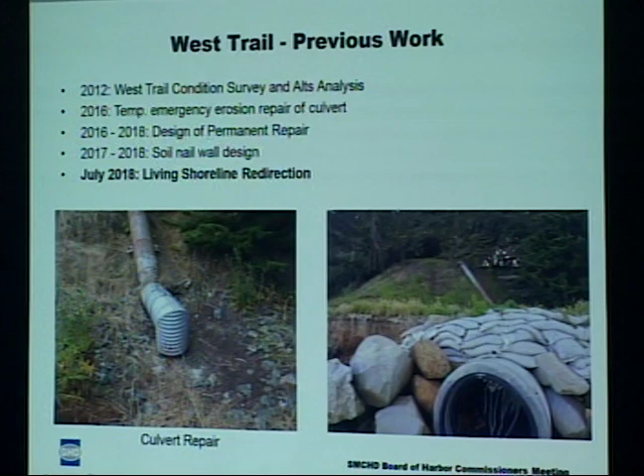Our scope of work is simplified and summarized here. Essentially we're going to look at the feasibility of the living shoreline project, minimizing hard features, notably the soil nail wall, and looking at that design to see where we might still need hard features, if any. We came up with a living shoreline alternative that we're putting forward to the commissioners tonight. Coordination with agency stakeholders, grant funders, and agencies is also in our scope of work, and we're just moving on to that task now.

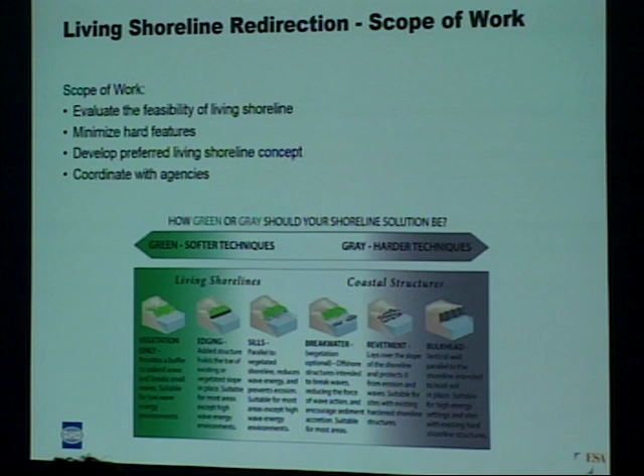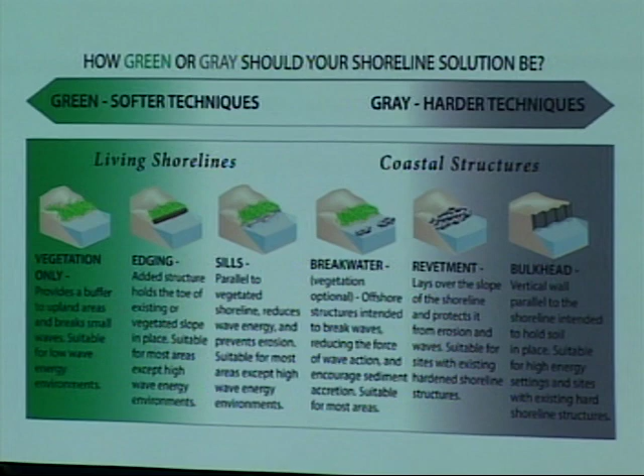This graphic at the bottom shows the spectrum of living shorelines. The living shoreline you select for a coastline depends on the wave energy approaching it, so how much hardened features you need is a function of wave energy. This is one of the first things we looked at: how much wave energy we're experiencing and what kind of living shoreline we think is most appropriate.

The first thing we wanted to understand better is our site. Why are we experiencing this condition? Why are we eroding? To go more into that, I'm going to hand it off to Bob Batalio to speak to coastal geomorphology.

My name is Bob Batalio. I'm with ESA, and I'm an engineer. I know most of you, I believe.

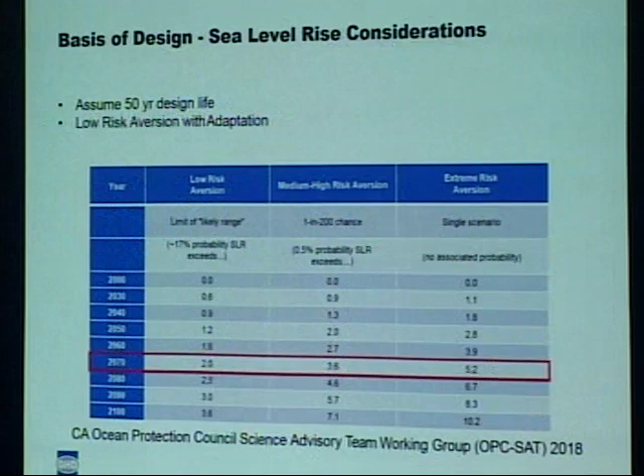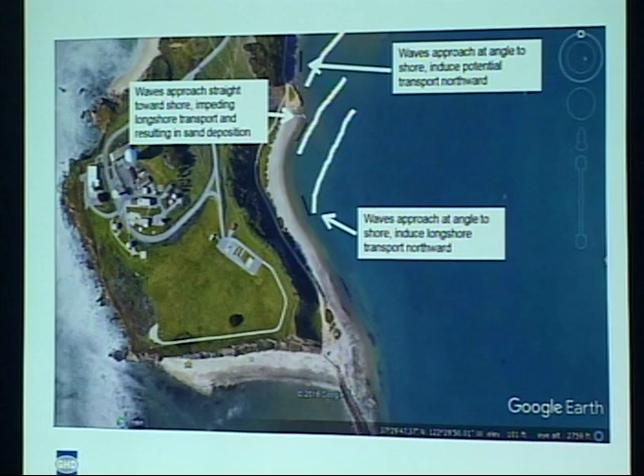When we look at our site, again we see this angle, and there's really no sand there, partly because it's probably blocked here and shunted off. There are some other things going on that we're still getting our heads around. We'll get back to this later as to what our concept is for this location and how it fits this geomorphic setting, and why we think natural infrastructure with sand, gravel, and cobble is a viable alternative here, and why we think it'll work.

So do you want me to hit the sea level rise, or? Sure. Okay, thanks, Bob.

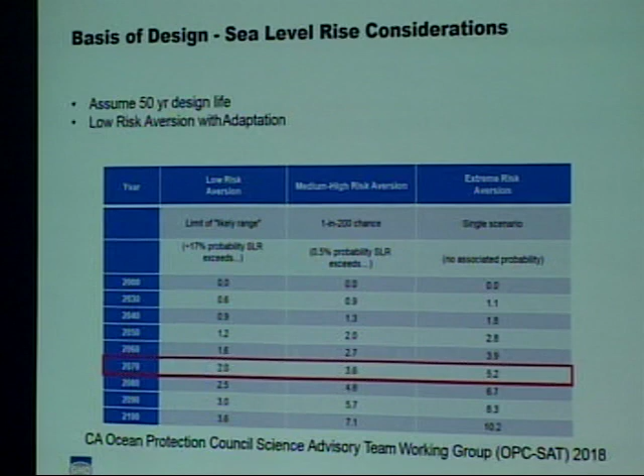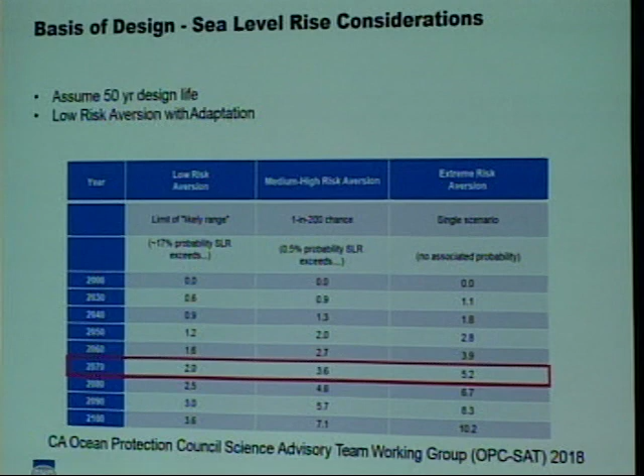So, of course, the geomorphic setting is one thing we looked at. Another thing we're considering in our design is sea level rise, and what kind of rates of projected sea level rise we want to include. There's two different ways we can go. We can either use a lower risk aversion projection, which are lower numbers in our design.

Since it's a trail, that might be appropriate. It's basically a higher probability of occurrence. So we can use a lower rate of sea level rise and adapt later, or we can use a higher rate of sea level rise into our design and then not have to adapt. So those are kind of the two decision points we have.

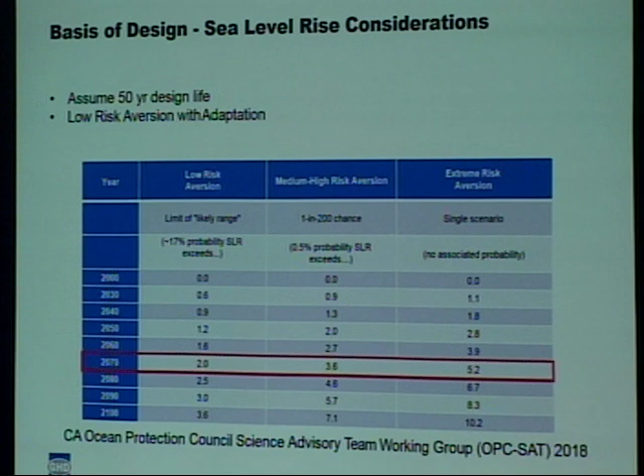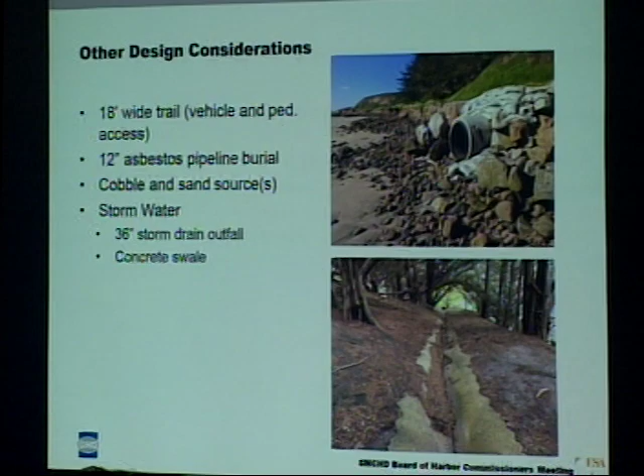As I said, we have a concept developed, but there's some tuning that we still need to do, based on conversations with everybody. Other things we're thinking through in our design is consideration of an 18-foot wide trail to maintain emergency vehicle access and, of course, pedestrians. We have an asbestos pipeline within our project area, and we know it's there, and there's ways to accommodate that in our design, bury and protect it.

Where we can source cobble, gravel naturally, or kind of within the local region that's not too out of place. So importing this material that's kind of native looking, and also where we can find sand. We understand there's some sand sources available that we're excited about.

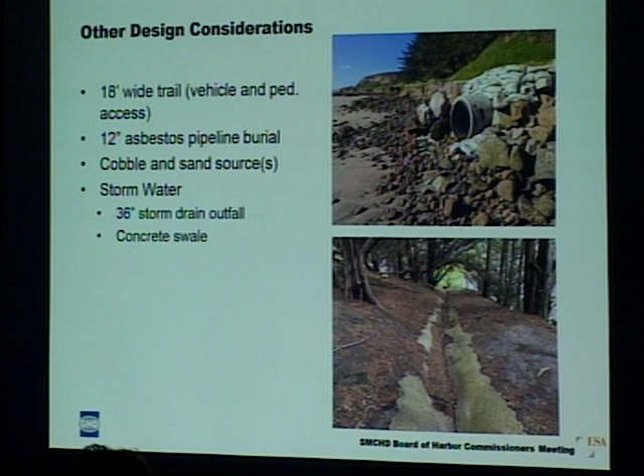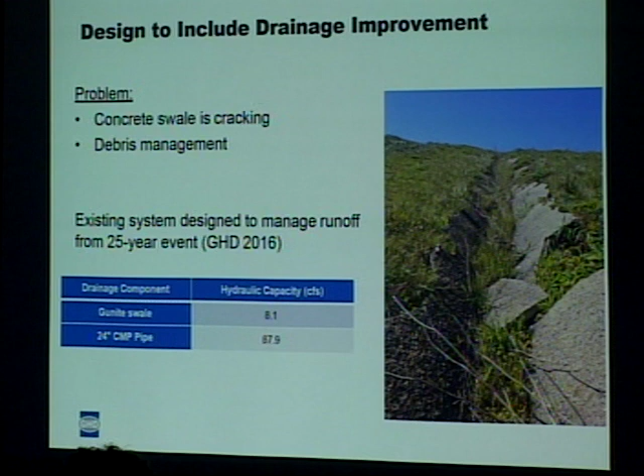And then also the stormwater infrastructure that's in place, and whether we know we need to repair pieces like the concrete swale, which was included in our old design of the soil nail wall, but we're also looking at the CMP pipe and wondering whether there's ways to kind of rethink what's there. Maybe can we remove that, and with some sort of energy dissipation, more naturalized looking feature with rock. So we're kind of thinking within our proposal, we have a feasibility of rethinking that drainage system.

So our living shoreline concept can be, I think Bob put it best, described as like a bookend, where we have a gravel cobble berm that protects our trail in an eroded state. And in a nourished state, if we have sand sources available within the harbor that we can utilize, we can potentially build out a beach and build out a dune system.

So we also have this rock finger element within the eroded case. We think that longshore transport of sand is what's eroding our beach here. So we think that creating somewhat of a groin feature, something that interrupts the longshore transport of sand, would be something we'd want to include, but we're still kind of tuning that based on future work.

And so this is kind of like the two ends that we could see at our site. And to speak to kind of the eroded bookend, the gravel and cobble beach, I'll hand it back to Bob.

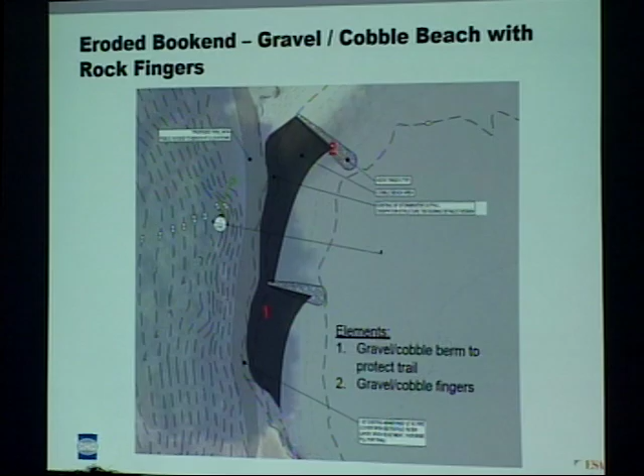Can I ask you something about the previous slide? Sure. So the number 1 and 2 fingers, can you point out where those are going to go? Is that just along the West Trail, or maybe right there?

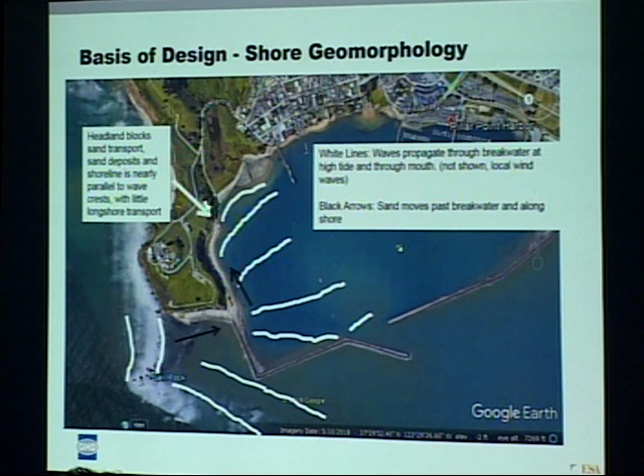It would be—this is kind of hard to see—but there would be one right here. There's actually an existing rock finger, and we want to emphasize that a little more. The other one would go close to the junction with the beach, depending on whether we have the outfall or not—maybe we don't need it there, maybe we can reroute the drainage. But if the storm drain outfall is still there, we'll probably locate the second one just south of it, so it's not in the area of deposition and is more in the area where it will be free to flow.

So they're pretty close together, that makes sense. This is a very enlarged view of a small area. Yeah, the idea is as low a profile as we can make them.

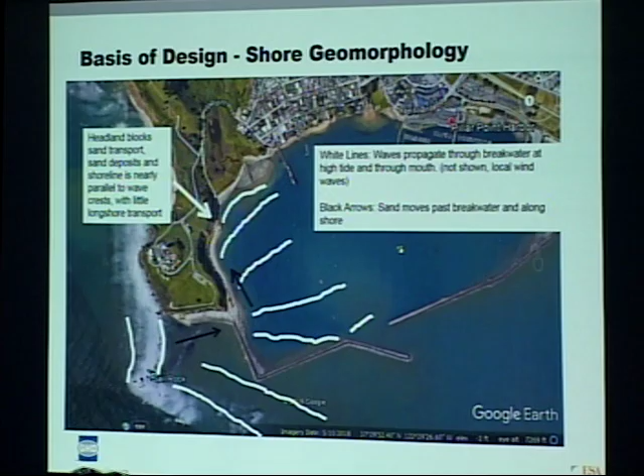With native-looking rocks if we can—that's one of the challenges. We're going to have to look for some rocks, and we don't want to cause a problem somewhere else. Ideally, they would match what's already out there, or close to it, and that's why we have this picture.

This is at a medium tide, but at a lower tide you can see there's a lot of rocks scattered about here. There's a couple—like this is a piece of concrete from something—but a lot of the rocks are native rock. They're just pieces of this that have broken off.

So there's a rock finger—let's see, actually this one, it's a little hard to see, but here and here—one of these two is where we would try to emphasize this more and extend it, and you probably wouldn't see much of that rock finger at this time. But the idea is that the gravel would have a place to deposit, like it is in this little spot. Did I answer your question?

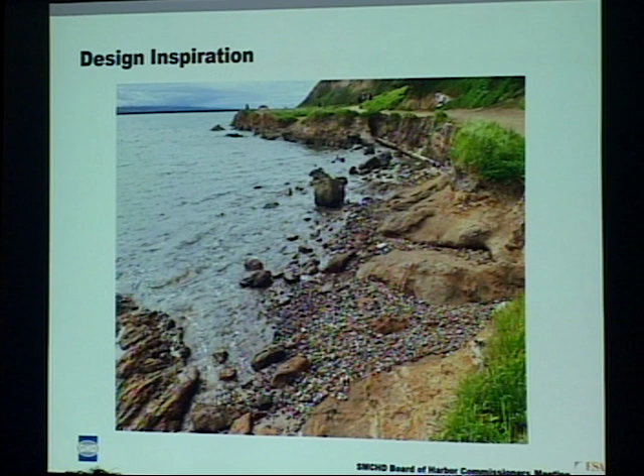And then we have a rendering—so anyway, this is what ideally this would look like: we would have the rock fingers here, put in the gravel cobble, and then cover it with sand. We may extend the rock fingers a bit to hold the sand. This is one of the parameters that we need to sort out.

Ideally, we would get something like this, which looks like the trail to the south. We recognize that this is really cool, and the Coastal Commission staff should hopefully really embrace it, but we do have to recognize that this is a bigger footprint of fill than a small one, so to some extent we'll have to see what people say. But we're pretty confident this is the way to go within a range, and we think it'll work great. I'm actually really excited about it.

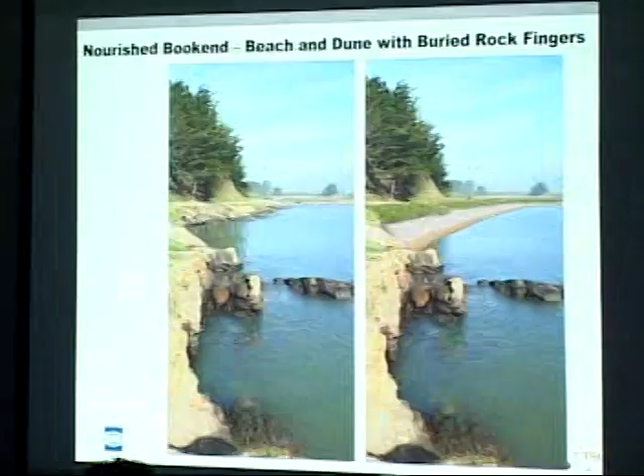Same, thanks, Bob. Thank you. And as Bob mentioned, the beach to the south was kind of our design inspiration for this site.

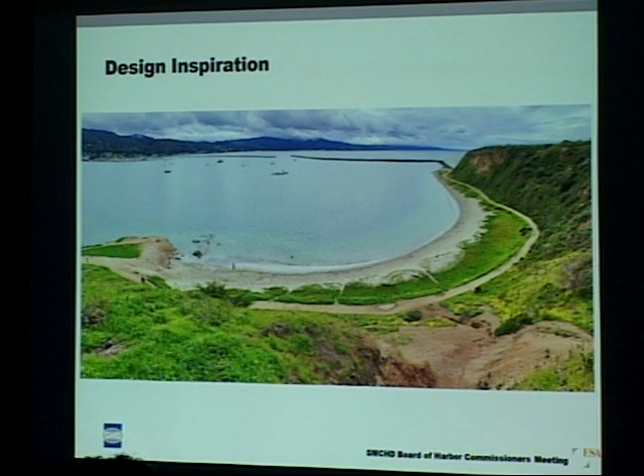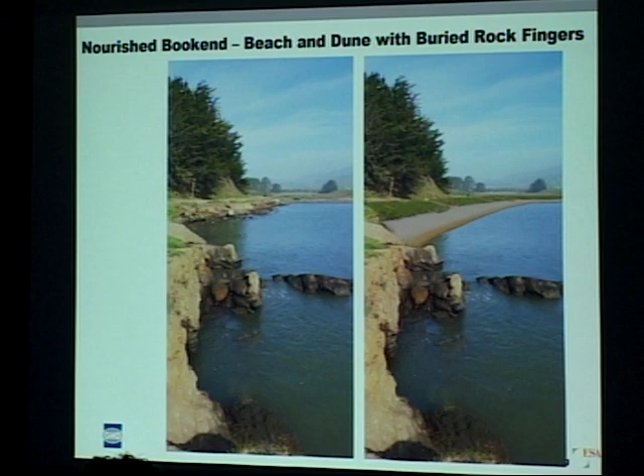Nice shot as you get on the far south side. That's kind of the scale we're looking at, as far as width, which is about a 50 to 70 foot dry beach, including the dune. We estimate needing about 5 to 10,000 cubic yards of sand to develop something like this.

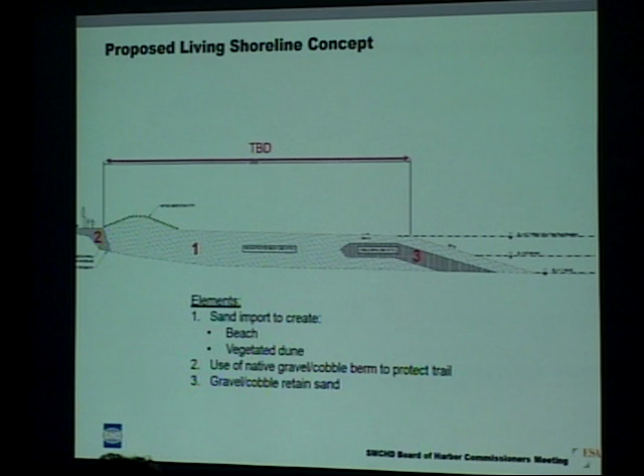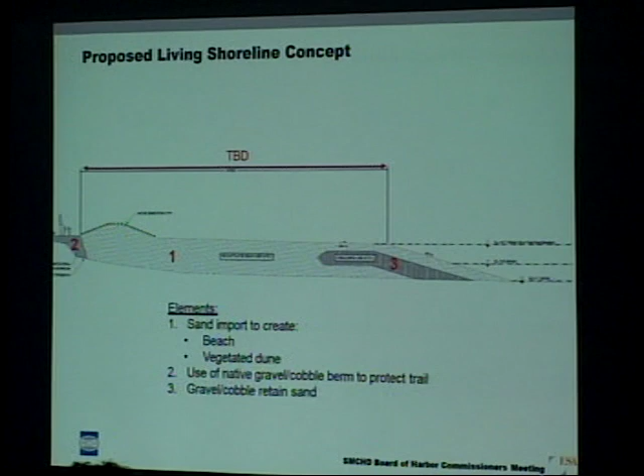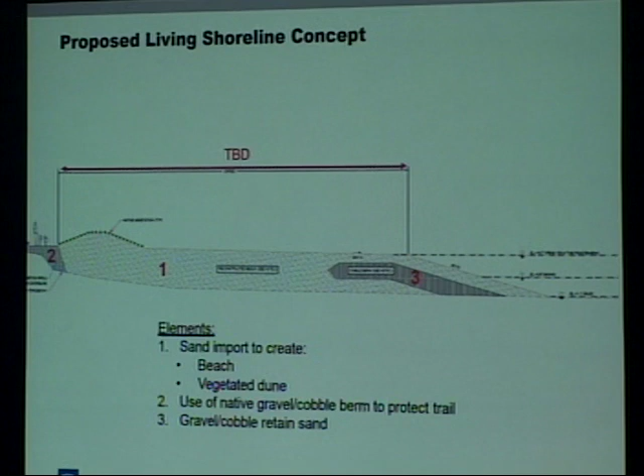This is going to be a discussion with the agencies about the width, and obviously input from the community and stakeholders about what elements are most important, habitat versus recreation. We want to balance everything, but it's going to be a moving target. The agencies involved are Coastal Commission, Army Corps, and Regional Board, since it's a fill within waters of the U.S. We hope to bring habitat in, so sometimes they consider that a net zero, or self-mitigating. That's where we hope to land.

One of the issues with these living shorelines is they're actually very popular and used all the time on the East Coast, in places like Florida, where they have an existing permitting system set up to make it streamlined and easy. Here, they don't so much—it's a new thing, so the Coastal Commission approaches it cautiously. The difference is that on the East Coast, the alternative is big seawalls and revetments, which are much more common, so they're kind of incentivizing this new method. Here, we don't have those options of building seawalls anymore, so it will be a bit of a challenge, but I think they will embrace it. They're going to ask for a lot of information, and there may be some slight modifications to the design through different iterations to address permitting concerns.

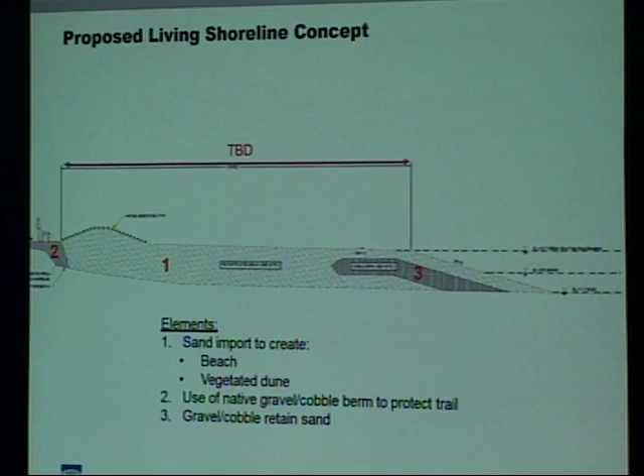Just to give people a sense of scale, the amount of sand here is 5 to 10,000 cubic yards, and the Surfers Beach replenishment project is about 75,000, so it's much bigger. Another concept with this is that there are other places in the harbor where we may want to protect the shoreline, so I look at this as somewhat of a demonstration project—something that could work, and we could learn from it to move on to the next project with a little more confidence. That would be our permitting approach, just like we're doing with Surfers Beach: demonstration, pilot type.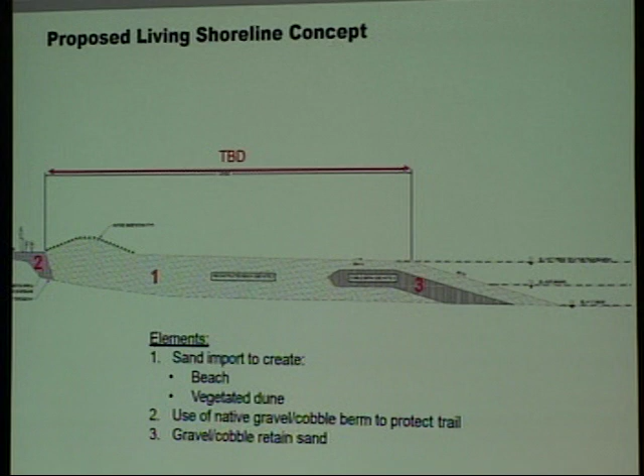So are y'all going to be talking to CAL FIRE at all, just to make sure they'll have adequate access? Or Coastside Fire, which I think is CAL FIRE. With the 18-foot width, is that— well, I don't know, have y'all talked to them? That's my point, I haven't. Is that correct? I don't recall those conversations, yeah, and based on our past experience, that would be adequate, but that's something we would definitely do.

Just because over time, that's a concern now—if there's wind, erosion, any kind of change, they'll know what they'll need, but I would highly suggest y'all talk to them just to get an understanding of what they need, because that was a concern of the public brought up a couple years ago when this project started, when I first got on. That was a pretty big concern, just emergency vehicle access. We would definitely do that, and we'd also want to control the type of vehicles used to accommodate that. They'd know what kind of vehicle they probably wouldn't use there, right? But the point is there has to be a conversation so it's available and accessible for rescue, water rescue, or whatever. That would be later. Do you have a schedule? Makes sense, thank you.

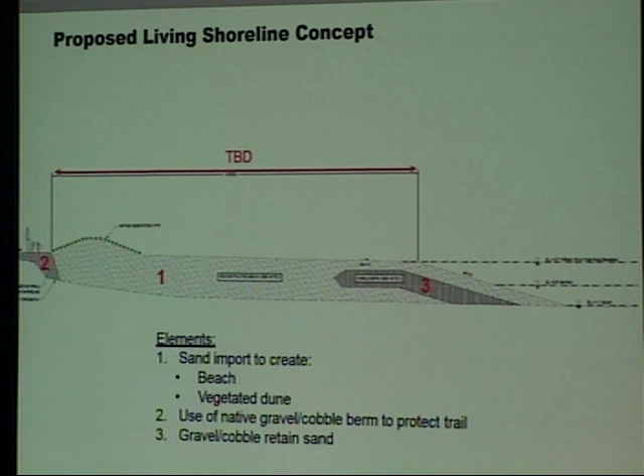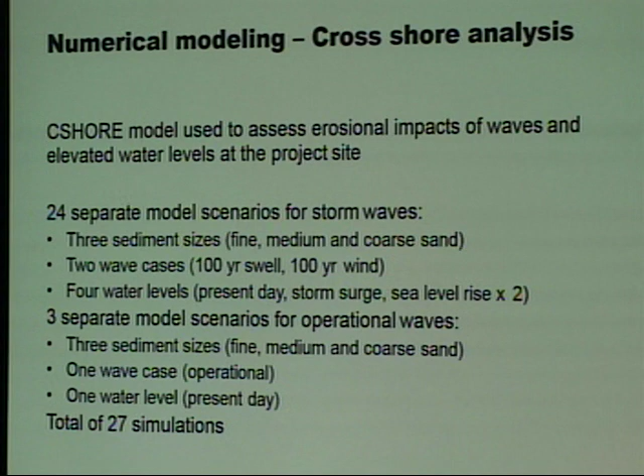So, when do you put them in order—this number? Within our scope of work, we did some numerical modeling to understand whether each would hold. There's more work to be done, but we did a first look and wanted to share that with you guys. What we looked at is cross shore—waves approaching the site straight on—and waves approaching the site obliquely. On the cross shore side, we used a model called CSHORE, and we looked at a total of 27 simulations. We looked at what we consider an operational wave case, kind of an ambient condition, using a 1-year data set from the Army Corps of Engineers. We also looked at extreme waves from that same study, including long period swell events and short period wind wave events.

What we found during the operational wave case is, with ambient conditions, we didn't see a lot of movement of our beach fill. So that's our trail, with a kind of exaggerated vertical exaggeration going on here, but there's the dune and there's the beach fill. You kind of see the erosion happening at the toe of the fill, but not a lot during the operational case.

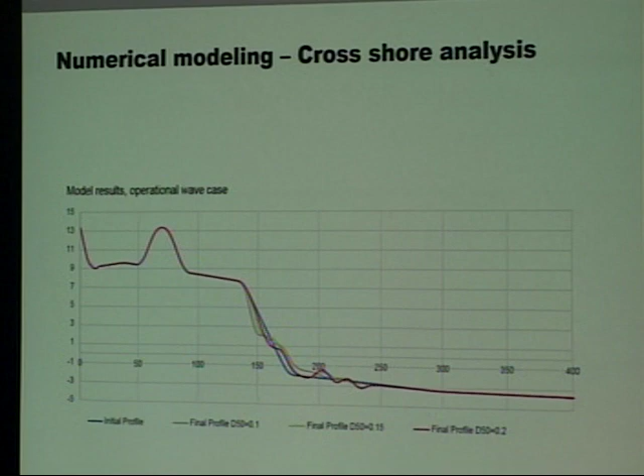Compare that to the more extreme wave case, and with elevated water levels from surge and sea level rise, we start to see more erosion within our profile, especially with sea level rise. The most eroded case you see, that light blue line, is about 3.5 feet of sea level rise.

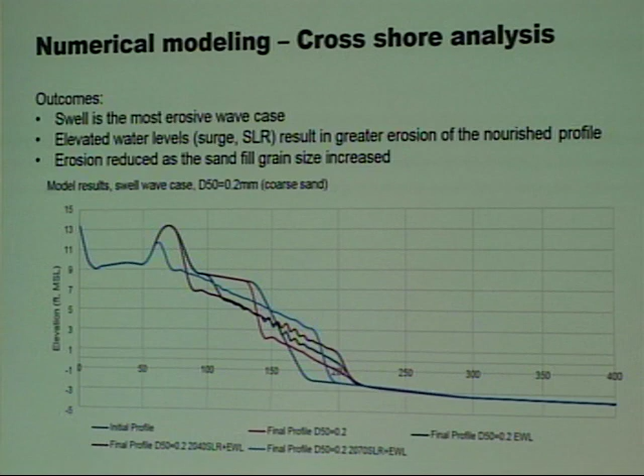Again, this is just to understand how this beach would perform, and when we think we need to re-nourish, or the maintenance schedule.

And then to speak to the long-term, or longshore waves, you see a picture of a wave approaching the site obliquely. We looked at a LITDRIFT model, with 6 cases focused on one sediment size. The other model looked at different sediment sizes, bracketing what we thought we'd see out there, about 0.1 millimeters to 0.2 millimeters D50.

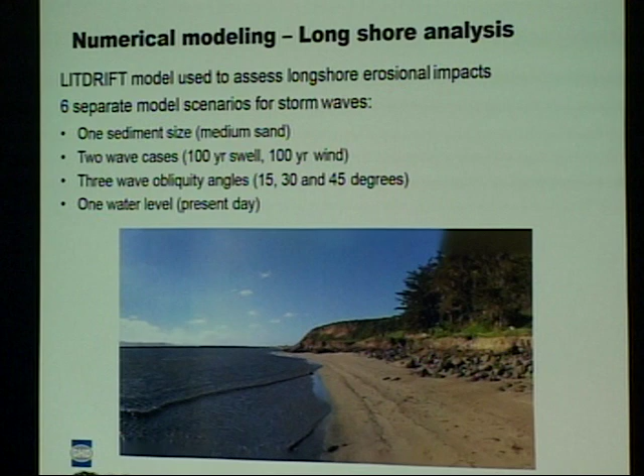This one focuses on a medium sand, and again we look at the swell, long period waves and short period waves, and different wave angles, trying to understand what that would mean for our beach fill. What we found is these short period waves approaching at an angle really did result in some erosion, which we expected. As wave angle increased, we saw more erosion, as we expect.

We really need to do a little more work to understand the frequency of occurrence of these waves at angle, or obliquity. In the ESA proposal, we talk about deploying a wave gauge to try to understand the frequency of occurrence and what angle they approach our site at during different conditions.

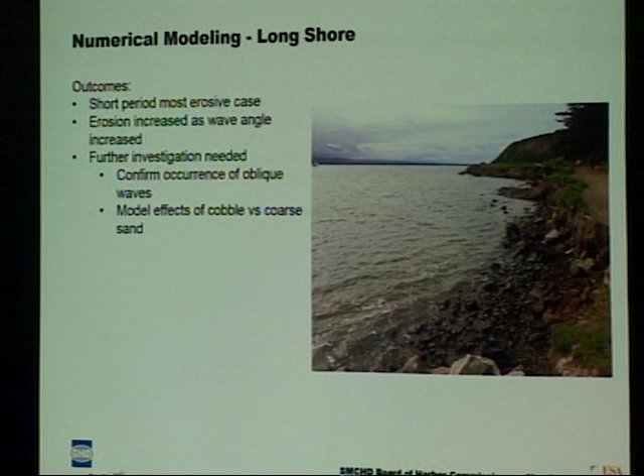We also need to look at this cobble gravel beach with this. We didn't model the effects of cobble gravel within our models. We expect far less erosion, but we need to do that check.

So next steps, we want to move this concept into final design, just permitting and CEQA, and again we're bringing this team together to do the work.

We also think, as was mentioned here, the monitoring of this project makes sense as a demonstration so that other communities can learn from it, seeing that with other living shorelines within the state.

And maybe adaptation, if we decide to go with a lower sea level rise rate, we can adapt over time, as using this site as a site for sand sources as they become available. We can adapt and tweak things as we move along.

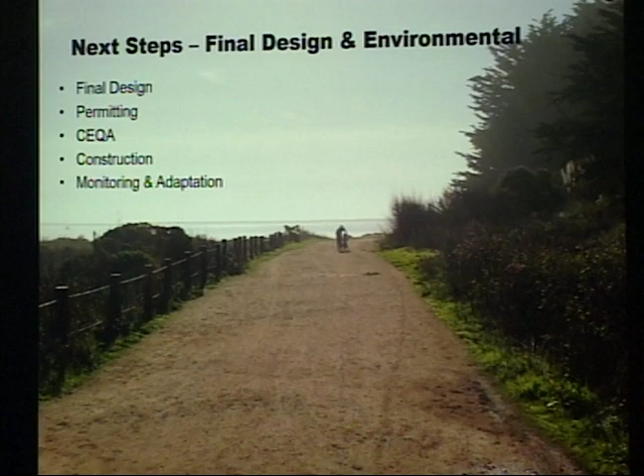If you look at all the reports coming out on the way climate is changing, one aspect is more intense weather systems coming through, and we've seen a little bit of that recently. Do you guys have any sense of, so the reason I'm asking is with respect to sand coming into the harbor, because we have a net amount of sand that's been accumulating over time, and like Bob said earlier, a lot of that sand just comes through the breakwater, and you can see it on the south side and on the northwest side of the harbor. So with more intense weather systems, I would expect, and since I'm not an engineer I'm asking the question, do we expect more sand to be coming in or less?

Mr. Damitz was able to successfully apply for a grant through the Ocean Protection Council for the necessary planning, engineering and design, environmental studies, and regulatory compliance and permitting. The grant award was for $75,000. The board approved acceptance of this grant at the October 2016 board meeting. Project management costs to date have been approximately $49,000, and therefore about $26,000 is still available.

Mr. Damitz was also able to successfully obtain a grant from the Division of Boating and Waterways for $800,000 for project construction and monitoring costs. This includes sediment placement on Surfers Beach of up to 75,000 cubic yards of clean sand excavated from inside the outer breakwater at Pillar Point Harbor. It will also fund a physical and ecological monitoring program during and after the construction phase to meet requirements of permitting agencies and to gather additional data that could be used in designing an ongoing opportunistic beach nourishment program.

Since the initial contract was issued in 2015, Mr. Damitz has led the project management, coordinating with district staff and contractors to accomplish the following tasks: securing grant funding for the project totaling $875,000; collaborating with GFNMS to identify acceptable project parameters; identifying all permitting requirements and conducting permitting workshops and site visits; coordinating with the U.S. Army Corps of Engineers to model a variety of project design scenarios; identifying a preferred project design alternative and working with engineers to develop permitting-level design plans; conducting extensive stakeholder outreach, including more than 12 presentations; and developing RFPs for engineering and sediment sampling and analysis services, and issuing contracts for those services.

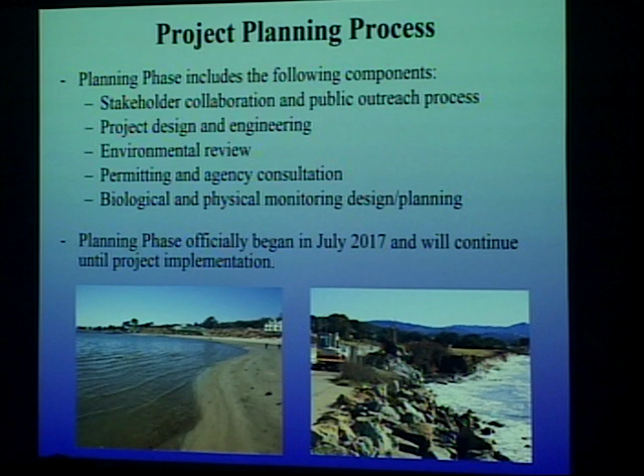So we officially began in July of 2017 with planning, and we'll continue this until the project is complete, which I can get into in a little bit.

So real quickly, because Anita did touch on this, we have made a lot of accomplishments to date, including a lot of outreach. Including Commissioner Lorenas even did a poster at one of the sea level rise events. But we've had a lot of presentations to different folks about it, and then a lot of meetings with jurisdictions and agencies to talk about the project.

But we also have a technical advisory group that is convened, mainly agency folks from the technical side of things, to provide input on the project design and engineering.

So speaking of design and engineering, at this point we've received a ton of input from all the different agencies and municipalities that are involved, and we've gone through a whole list of different design alternatives.

If you remember in the beginning when I was presenting this project 2 years ago, we were talking about the possibility of having to use dump trucks and excavators and move the sand physically because of sanctuary regulations. Well, we've virtually crossed out all of these alternatives and gotten to the point where we have a preferred project, which I'll present to you in the upcoming meeting. And I can give some of the details of that today.

We've looked at the design options and come up with this preferred alternative of where we're going to place the sand and where we're going to get it from. We've also issued a contract to ESA for providing the engineering services, not only at the planning and permitting level, but all the way through construction support, so we have them on board, and we know that everything's going to be taken care of, even when they're actually moving the sand around.

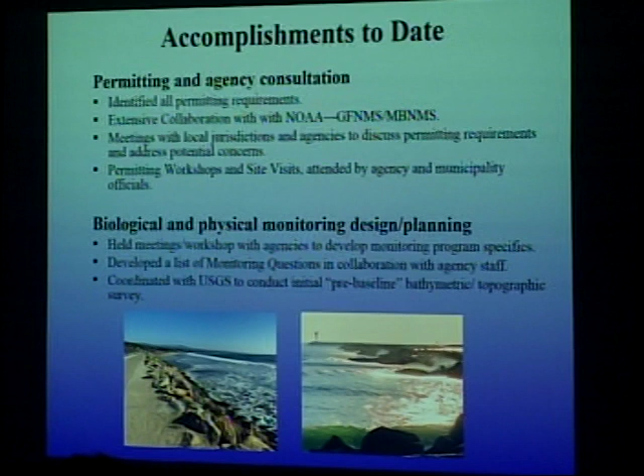The other piece that's going to help us refine the design plans - they've already done the permitting level plans, but they need to be refined based on additional information coming in. One important piece of information in addition to the eelgrass is the sediment sampling results.

We expect them to go out and get those within a month or so. I'm thinking either very end of April or early to mid-May. We have different core locations, so they're going to go in, and we have a whole plan on how to do that, so we can identify where the good sand is and rule out any areas where there's mud or other stuff that wouldn't be beach compatible.

Permitting and agency consultation, that's been a huge part of the work so far, just working with the sanctuary and others, trying to step through what might be workable and what might not. We've done some workshops and site visits and all that kind of thing. Those will continue, in fact probably ramp up as we move closer to the project.

Another challenge that we're working on is how do you do physical monitoring and biological monitoring to see how the sand, how long it stays on the beach, where does it go, how does the beach profile change over time, but also biological monitoring - are there any unacceptable impacts, turbidity, things like that.

Just more to show - we're not expecting anything like that, but we want to be able to show the agencies that we're not expecting anything and we didn't see anything. But if we do find results, then we can refine it and either say this is unacceptable, maybe we can't do this again, which I would not expect at all, or say we need to tweak the designs a little bit to mitigate some of these. Again, that's not anything that is expected, but it's a big requirement, particularly for the Coastal Commission - pretty complicated biological monitoring, as well with the West Trail project and others.

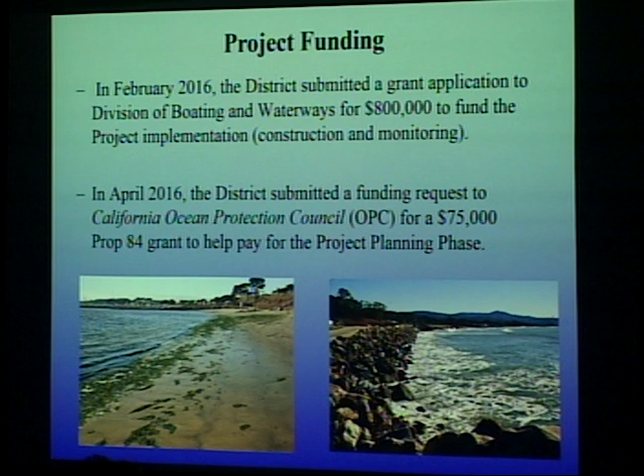Do we want to pass around a hat to other folks like Caltrans that are stakeholders that may want to contribute? Or there's other options, but that's going to be a question that will come up, that we'll probably reach out for input. And then, of course, the OPC to help pay for some of the planning, including my work on the project.

Anita touched on this - the main cost so far has been engineering, my project management costs, and then Kinetic is going to be going out and doing the sediment sampling, so they haven't been paid yet. Obviously the engineers haven't either, that's the whole contract for the whole project.

John asked me to touch upon what might be some of the costs that we can expect with a project like this. Of course my proposed project management costs, but also we're going to have to do more eelgrass surveys. That first one was just a baseline.

The eelgrass surveys are good for 60 days, so we're looking at probably wanting to do the project late spring because it's a good window as far as contractor availability - you get a better price. So these are all things we're going to weigh once we look at the costs. But we would want to do more eelgrass surveys, one at the beginning of the eelgrass season, which is April 1st, and then that's good for 60 days.

So, probably another eelgrass survey post-project. There's going to be some additional bathymetry and beach profile surveys that need to happen before the project, and some other biological stuff, but I'm not expecting a huge amount because the Army Corps of Engineers already did a full EA on the project, which we can use for a lot of the analysis, but there's going to be additional site surveys and that kind of thing.

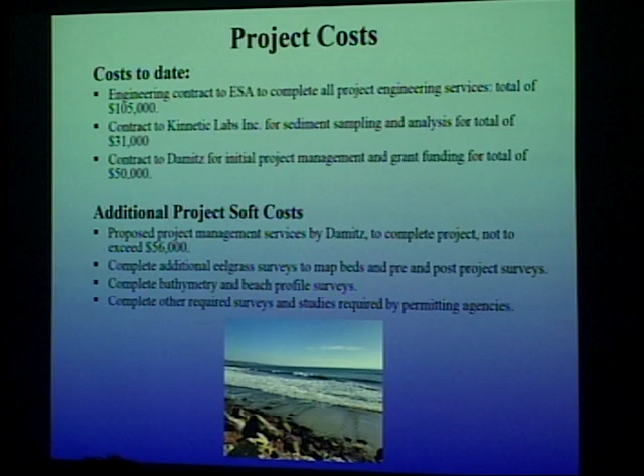That was the end of the slideshow. So I have a question. Could you back up to the studies slide? I think that was it.

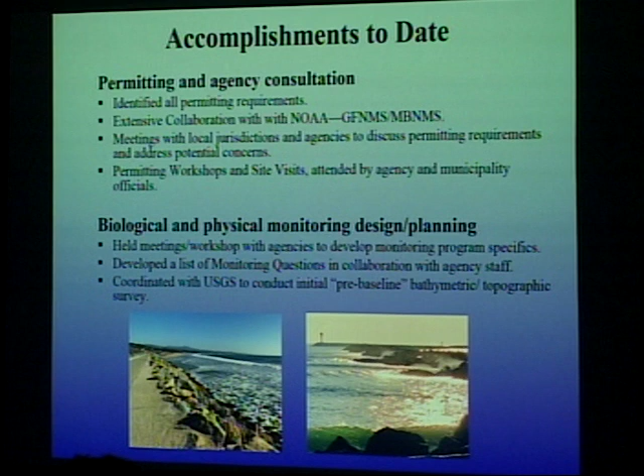At the climate meeting I was in, where the Surfers Beach project was highlighted, a question was posed at the breakout session on the studies: the physical and biological studies that are going to be done, are they going to do a transect that goes from the ocean side all the way through the shoreline to the revetments, or is it just going to stop at like mean high tide?

We're going to have to go a little bit offshore. It's going to be sort of a negotiation process to come up with the exact right program. The examples provided by the Coastal Commission biologist, who I believe was at that meeting, were for multi-million cubic yard projects with kelp forest and other sensitive rocky reef habitat. It was a completely different type of project, so I'm hoping they're not expecting us to do something like that, which would probably take up the whole $800,000 grant. So it's kind of undefined right now.

There's going to be a workshop coming up. I'm working with the Army Corps of Engineers to come up with a proposed approach, and then we're going to bring in the sanctuary and others. We've already discussed it with them. In our first workshop on biological monitoring, we got input from the agencies, and it was going to be a very simple project. Then later we got input from the biologists at Coastal Commission, and it seems like it's going to be a little bit more complicated. More on that when I present at the next commission meeting.

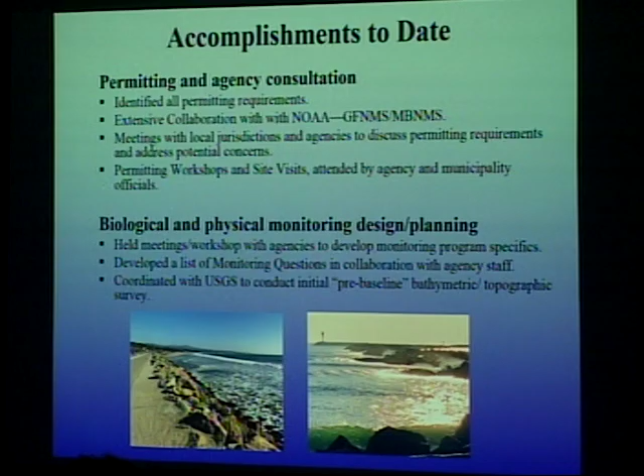All right, so I'm sorry, I know you guys said this already, but what is the schedule roughly? When do we think? So I didn't actually say that.

What we had been saying is that we were going to shoot for this summer. What we haven't formally announced is that, once we get the cost estimate and other things coming in, that's probably unrealistic, definitely unrealistic. The input we received from the technical advisory group is: if you can't do it by early to midsummer, wait until the following fall, based on not only the cost, but also because you want the material to stay on the beach for the whole summer.

So it might happen in the fall of 2019, is that what you're saying? No, it would happen in the spring of 2020. Oh, as early as spring of 2020, they would allow us to do it? Got it, okay.

And believe it or not, it can make a difference of like 20 or 25% of the cost based on when the dredging contractors are busy in the busy season. Sometimes before the busy season starts, they like to keep their crews busy and you can get a much better deal. So we're kind of looking at all these factors.

So I know we're gonna hear more detail on the next go round, but just thinking ahead, we're gonna do this in 2020, we're gonna move hopefully as much material as we can. In the event that we learn after doing it that the material doesn't stick around as long as we'd hoped, of course it's gonna have a beneficial impact as it moves towards Miramar. So it's definitely gonna be useful somewhere, wherever it goes.

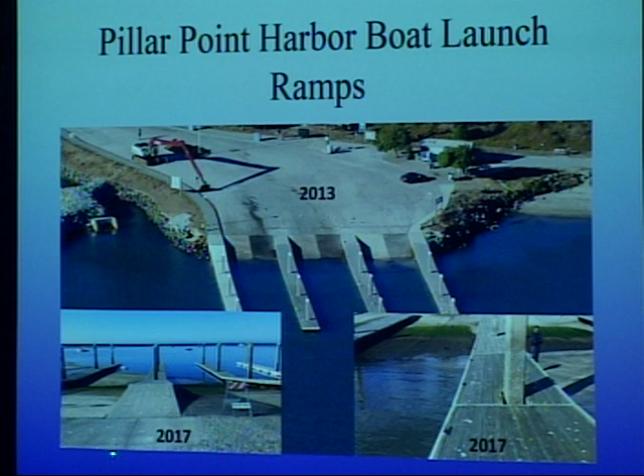This is after that big storm in 2017, about a month after, during a really low tide, a boat trailer got stuck on it, and that's what alerted the harbor district.

We got started immediately. The idea was that we should get the sand out of there as soon as possible, but we knew from talking with the Coastal Commission that they wouldn't allow us to do anything other than beach nourishment with it if it was good quality sand. So we couldn't dispose of it or put it in any of the spots it was put before. So we decided, let's just find a place to stockpile it until we can get the permits to actually do beach nourishment with it and use it, which is the harbor district's and the commission's direction we wanted to take.

So anyways, that became a challenge. We looked at virtually every private and publicly owned site that would have been suitable in the area, and there were a lot of negotiations that occurred.

To make a long story short, after a year of approaching the county to use the Half Moon Bay Airport stockpile site, we were finally approved and issued a permit fairly recently. It required us to pay rent, and full disclosure, as long as we store that material at the stockpile site, they charge the harbor district $4,500 per month, which is an incentive to get it out of there as soon as possible.

Is that 100% covered by FEMA? I believe so, John. There may be a 10% cost share, but that can be offset, and certainly John has put in plenty of hours, and so has Anita on this project. The figure of 390 is what we came up with working with FEMA, based on other costs, trying to come up with a not-to-exceed number.

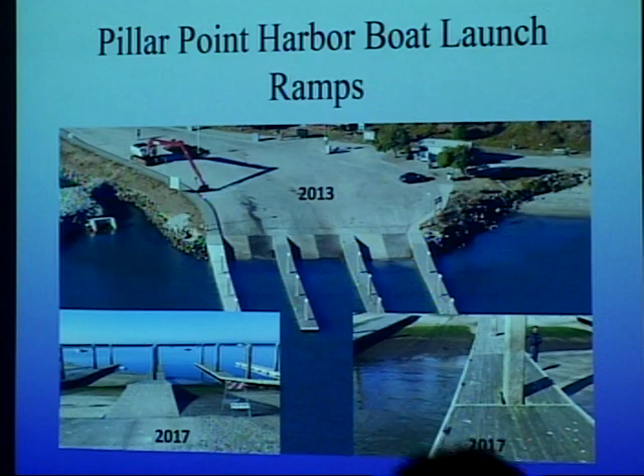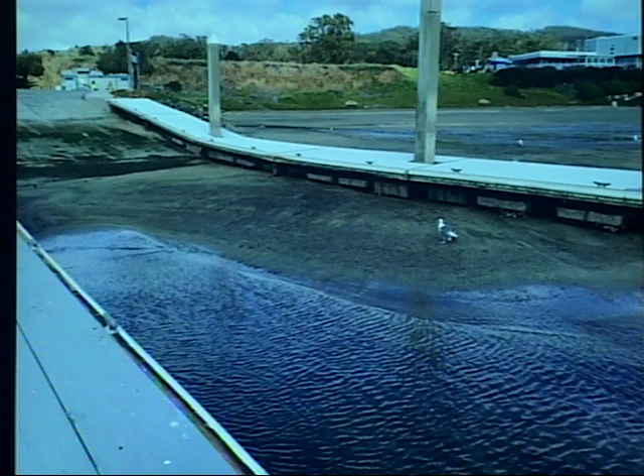Okay, and it's very good quality sand. We had it tested, and it's 97.5% coarse, most of it. So we definitely do want to use it on the beach.

Okay, so another thing I want to clarify here - we have two phases of the project. The first phase is to get that sand out of there and move it to the stockpile. That's what we're working on now. We actually received the Coastal Commission CDP, and everything else is in process. It's out to bid, and things are actually moving forward on that.

Phase two is what do we do with the material once it's there. We can't leave it at Half Moon Bay Airport - we want to get it out of there as soon and as reasonably possible. So phase two is to relocate the sand stockpile to a beach, generically, and I'll get into that in a minute.

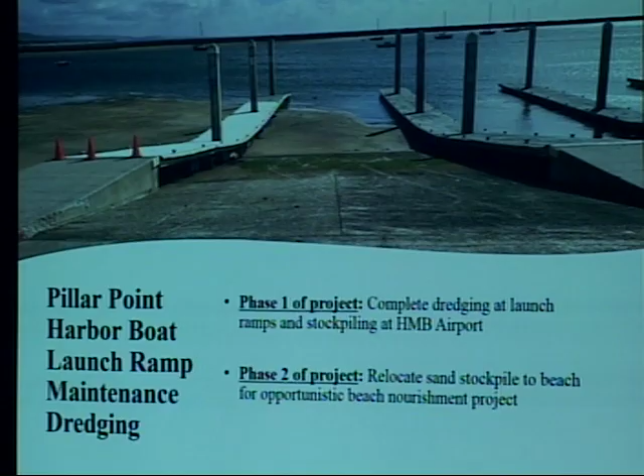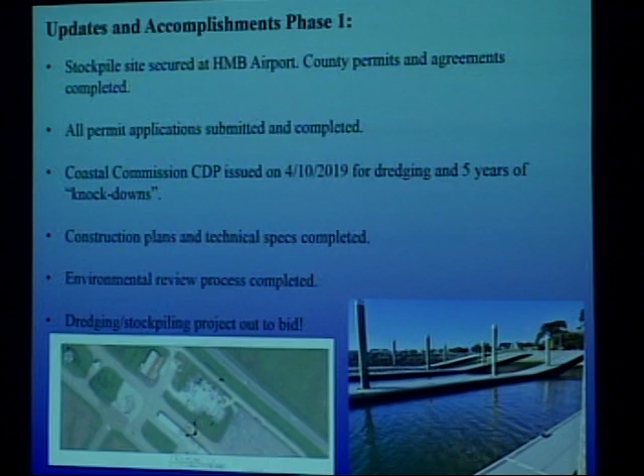So, accomplishments so far - Anita touched on a lot of this, so I'll flip through it quickly - but we did get all the permits for the county airport. One of the problems was we couldn't finalize any of our other permit applications until we had the stockpile site secured, so that's why this has dragged on for quite some time. That's one of the reasons it has.

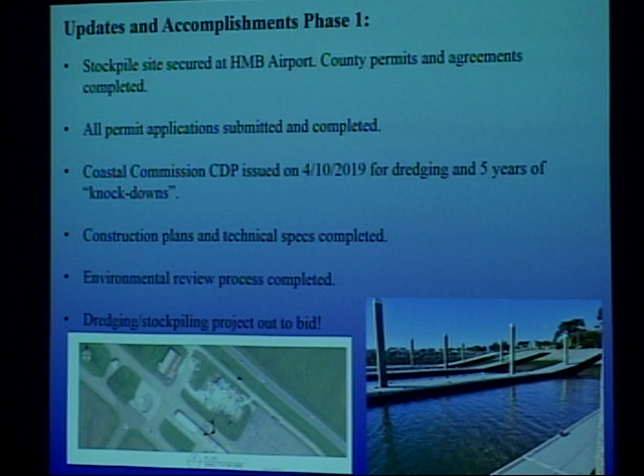Another interesting thing - I've given a presentation on this before, and mentioned that the approach was to go for a multi-year permit so we could do more than one dredging episode. We changed the path on that because it would have taken longer for the Coastal Commission to issue the permit, and we wanted to do it as soon as possible. But also, because we knew Surfers Beach was coming, as part of that contract we're working with the Army Corps of Engineers and Coastal Commission to get a multi-year permit to complete dredging of the launch ramps and Surfers Beach for 10 years - probably 5 years for the Coastal Commission with an easy renewal.

So in lieu of doing that multi-year permit, we did get them to give us 5 years of what's called knockdown. So let's say we go out there in July, clear everything out, then next winter there's a big storm and it all gets flushed in there again. A knockdown would let them get in there with an excavator and push it into the deeper areas until later when we could do a bigger launch dredging project. So that's a big deal - we don't have to wait and get the full permits and everything.

Quick, we just show them some plans, some figures. So that's done, as of the 10th. I just want to make sure that was connected with the CDP. There's still requirements before it's active that we need to submit, but that's all in the works.

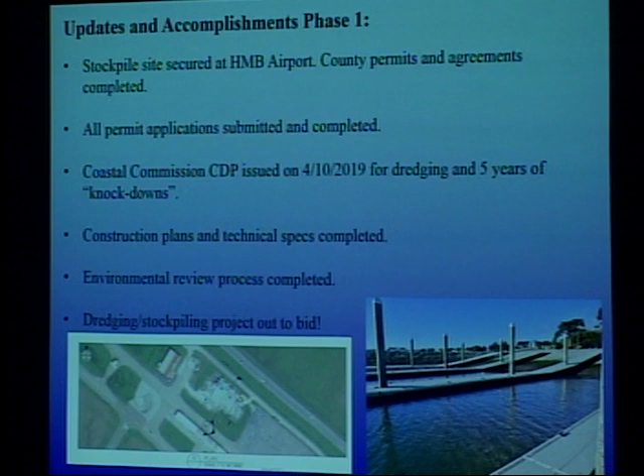So phase two, the most important and pressing thing is we need to find a site that's going to be acceptable by regulatory agencies and the public, that is the quickest option to move it from the stockpile site back to a beach. In our permit applications to the Coastal Commission, we provided 3 options. One of them is Surfers Beach. I think to get the material from the airport to Surfers Beach presents some logistical challenges - may not be the ideal way, but it could be used for Surfers Beach for sure.

The other one, which could be optimal if the timing is right, would be to use it for the West Trail, which would require 5,000 to 10,000 cubic yards - it's a small portion. But as we move forward with this programmatic permitting approach, we can identify down the road future launch ramps, say they take 5,000 to 7,000 cubic yards every 8 years or 6 years, and maybe put that on West Trail. There's all kinds of things you can mesh the projects together. I think it's kind of exciting. So we need to find something that the regulatory agencies and the public are going to approve of.

So the second one is West Trail. The third one is the Princeton shoreline, where there's a lot of rock revetment. However, there's been some public concern about placing the sediment there that we would have to deal with. But I'm going to start those discussions as soon as possible as we move this forward, and get the permitting underway, because that takes some time for a project.

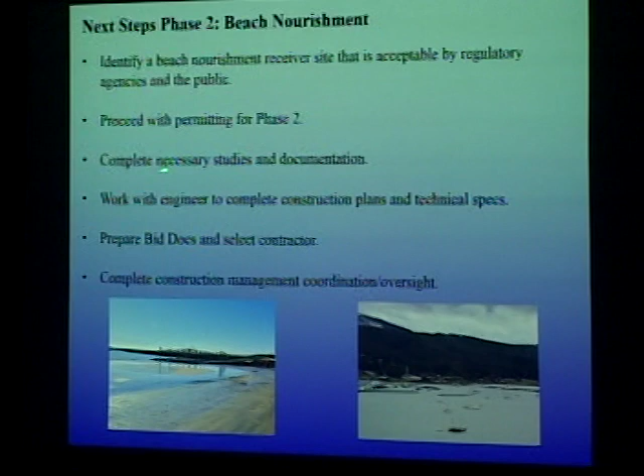So then for phase two, the tasks that I put into that proposal were basically to oversee everything: doing the permitting, finding the site, doing the bid documents, working with the district, getting the contractors on board, overseeing the process, making sure they're meeting all the permitting conditions, everything until the project is complete.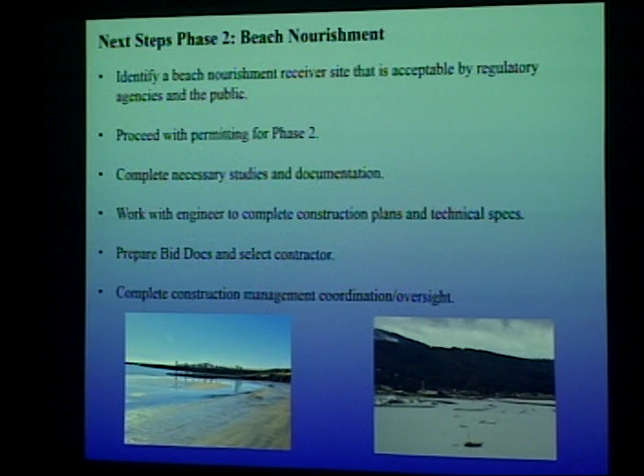It's great, but I guess to sum things up, finally we're in a spot where we know it's gonna happen in the near future. We've got bids coming in, we know there's some interest in the project. We'll see how many bids on May 1st.

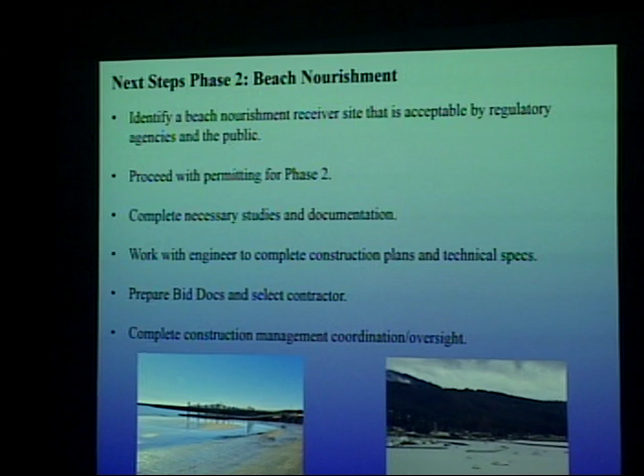May 1st, okay. Is there any discussion about pumping it over the seawall like they do in Santa Cruz and other places? Yeah, that would basically be the Surfers Beach project, so I think we would do it in combination with that.

I thought maybe you could use it to build - the way they're gonna do the Surfers Beach project is to build a containment berm on the outside and then fill that in. I thought maybe this could be used as part of that containment berm in the beginning or something.

Santa Cruz has a different situation. They do have a multi-year permit and monitoring program, and that was probably decades in the making. But they also have a lot more sedimentation in their harbor, so they're dealing with constant annual dredging needs.

I know at the Pacific Fishery Management meeting that just took place, the sanctuaries took a lot of grief over this launch ramp and our Surfers Beach project alone. I've been told that some people want to have meetings with not only the Greater Farallones Marine Sanctuary people and some others, possibly even a Congresswoman's aide, because there's a great deal of frustration about not being able to use this launch ramp.

So, to be fair, the launch ramp is outside of the sanctuary's jurisdiction. They have nothing to do with it - if you want to talk about slowing down the process, I could give you a list of other players in this. I don't want to do that, but it certainly wasn't the sanctuary.

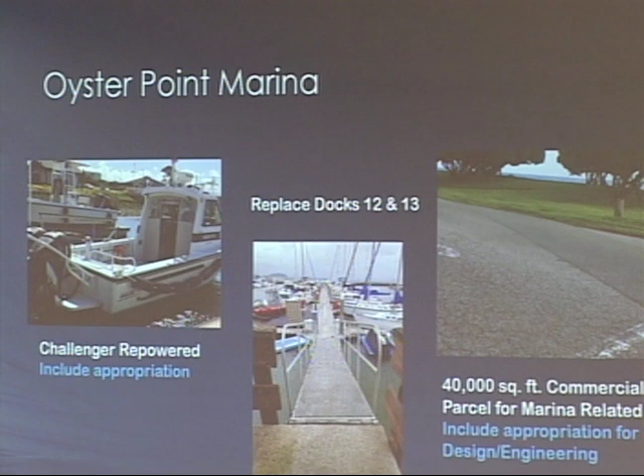Okay, and this slide shows the capital improvement program, and that's what's included in this preliminary budget. We'll probably make some changes based on the finance committee's direction, but this reflects, if you turn back to page 13-28 or page 24 of your budget document, the Pillar Point Harbor, Oyster Point Marina, and administrative capital projects. Another part of the capital improvement program is going to include some of these projects, and I left these up here to go through them to give you an idea of what the 19-20 operating budget might look like.

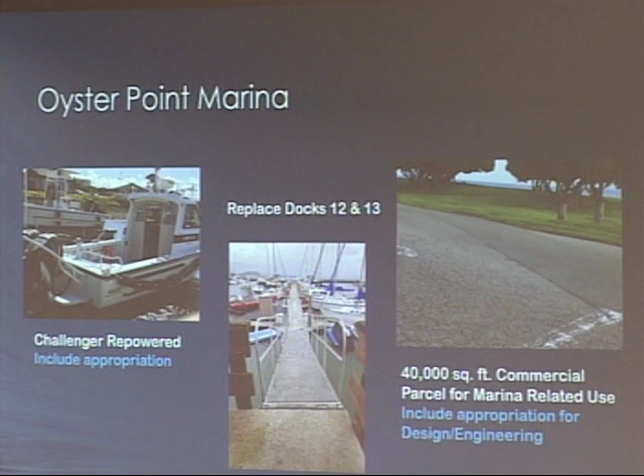So things like buying two motors for the Challenger, I would think that we could include that in the 19-20 operating budget. It's not really a capital improvement program, it's more that we need to buy a capital asset. So staff is recommending that kind of capital asset be included in the operating budget portion of this document.

The replacement of docks 12 and 13, there will not be any appropriations approved until staff brings forward a staff report asking for appropriations for that project, whether preliminary engineering and design or construction appropriations. The 40,000 square foot commercial parcel, we would include appropriation for design and engineering, because my understanding is that has already been approved by this board.

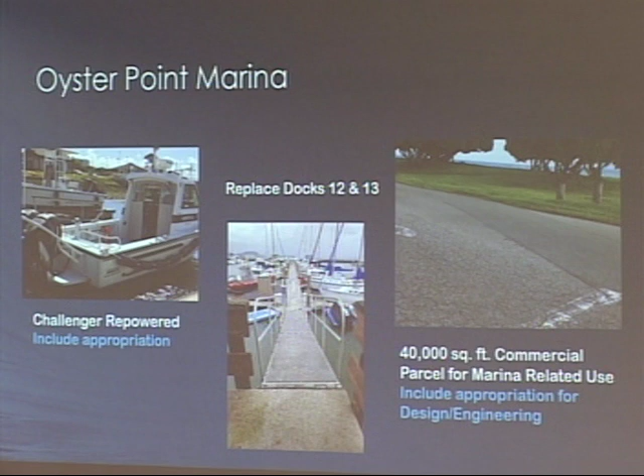What is that? I'm sorry, what is that project? John, can you talk about that? And is that correct? We've not even yet had that 40,000 square foot parcel defined at Oyster Point yet.

So it's been brought to the board in the past, and it's been a placeholder in our budget as we've tried to allocate and project forward monies that could be spent on capital improvement projects. At some point, once that 40,000 square foot commercial parcel is designated, that the district's entitled to at Oyster Point in accordance with the MOU, we would come to the board and reach out to the community to determine what the best use of that 40,000 square foot would be. Part of that would be design and engineering for whatever we decide the highest and best use would be.

So then we would probably bring this appropriation, the board would approve it during the time when we bring that design engineering contract to the board.

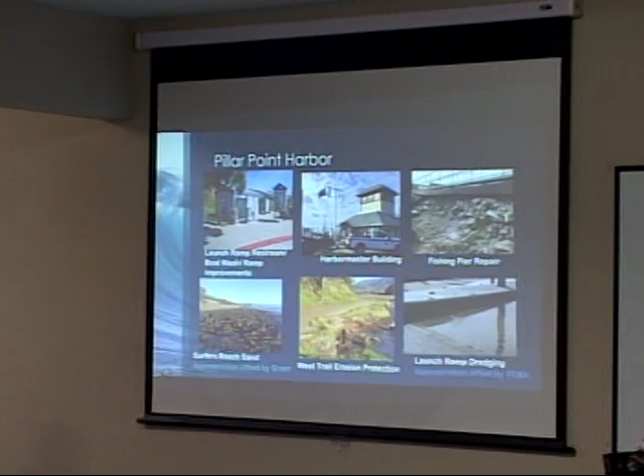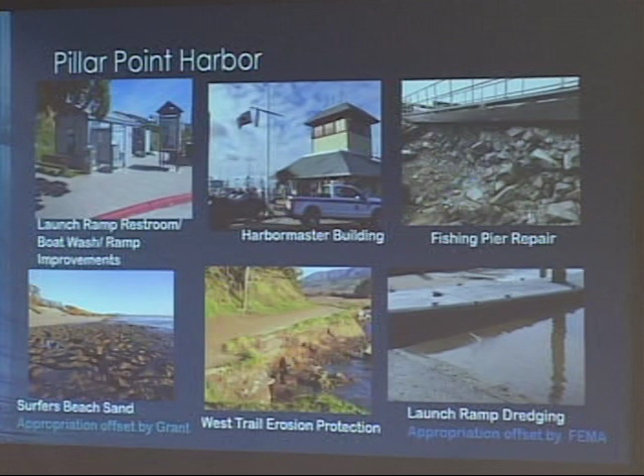For Pillar Point Harbor, these are some of the projects we were just going over, the West Trail erosion protection, surfers beach sand. So we'll look at each of these, look at what's already been approved by the board, and come up with a mechanism to make sure that regardless of the cutoff date, like June 30th, 2019, those appropriations will move forward from year to year.

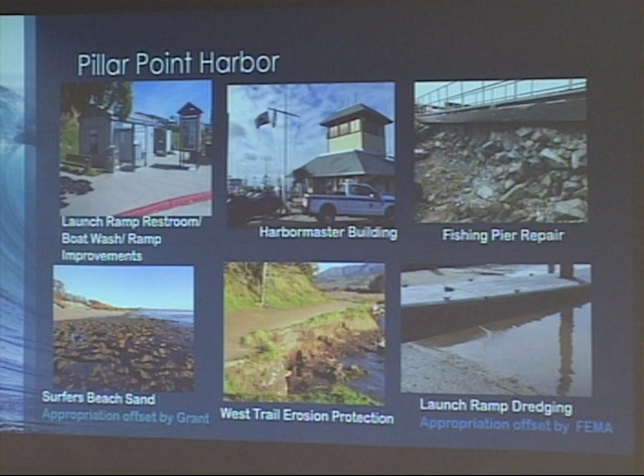Probably using an encumbrance accounting method, which is a way to save prior years' resources to move forward for contracts that you've entered into in the current year.

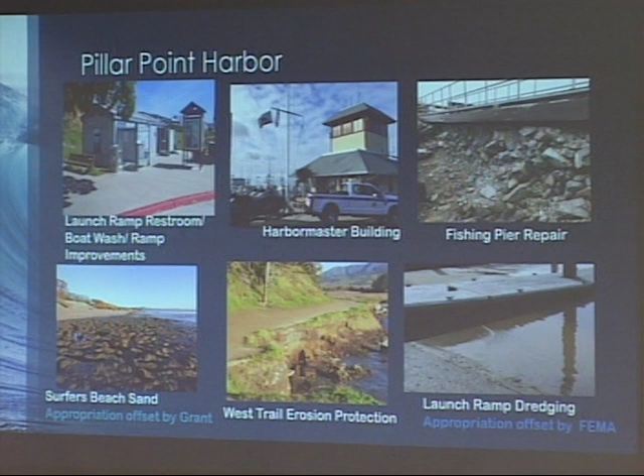Could you explain that in a different way, just so it's easier for anybody watching this to understand? So encumbrance accounting is a budgetary term that is used to set aside current year budget resources for future fiscal year periods.

For example, we have a $1.3 million preliminary engineering design contract for the Johnson Pier H-Dock project. We're not going to spend $1.3 million by June 30th, 2019. We may spend, say, $200,000. The other $1.1 million will go into an encumbrance account, and we'll be able to spend out of that encumbrance account in fiscal year 2019-20.

Okay. And that's gonna be like a separate fund, there's gonna be an indication that that's gonna be separate right in the budget. Yes, it requires some procedures to be implemented and a process to make sure that there's a list of open encumbrances the staff and the board can review. It's gonna take work, yeah.

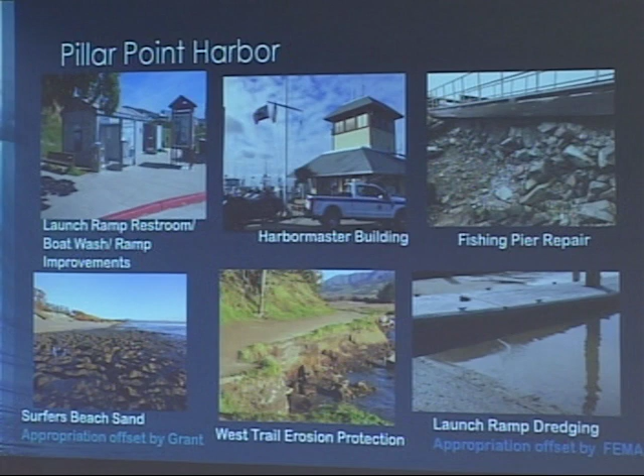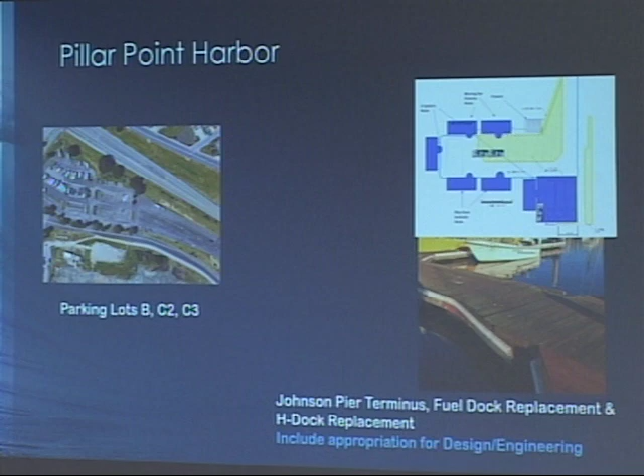Alright, so this is the Pillar Point Harbor Motion. And so appropriations for Surfers Beach, that will be something that we'll make sure that we have in there. There's a lot on dredging, the things that we have approved tonight, and the appropriations for the design and engineering for the Johnson Pier Terminus project.

So I'd like to make a motion, unless there's more comments, that we adopt resolution 10-19-08, approving the preliminary budget for fiscal year 2019/20, with the following changes. The preliminary budget shall contain two distinct sections: operating budget, capital plan budget. The budget shall contain appropriations for already approved capital projects and vehicle and vessel replacements. The appropriations for all other estimated costs associated with capital projects shall not be part of the 2019-20 operating budget. It is the intent of this board to amend the budget appropriations when a capital project is presented to the board, and the board agrees that the project should proceed. And three, the capital plan.

What was the last thing, Ed? The board what? Agrees to what? I'll read that sentence. Yeah, sorry, again. I'm trying to find it. That's okay.

The appropriations for all other estimated costs associated with capital projects shall not be part of the 2019-20 operating budget. It is the intent of this board to amend budget appropriations when a capital project is presented to this board, and the board agrees that the project should proceed. And third, the capital plan budget section of the document is a planning tool and shall not include reference to appropriations.